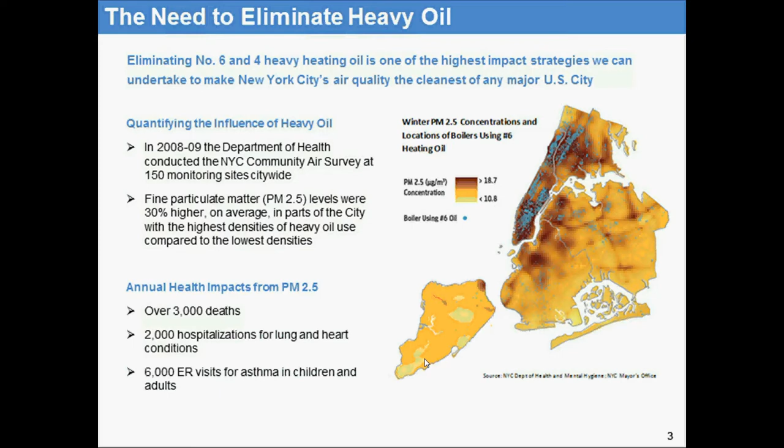And then, so what EDF achieved is a new regulation that the Department of Environmental Protection came out with last year. It started kicking in this July 2012, where every building burning number 6 oil whose permit expires needs to switch to at least number 4 heating oil. So it's not just 2015 like some people think. It's actually when your permit expires.

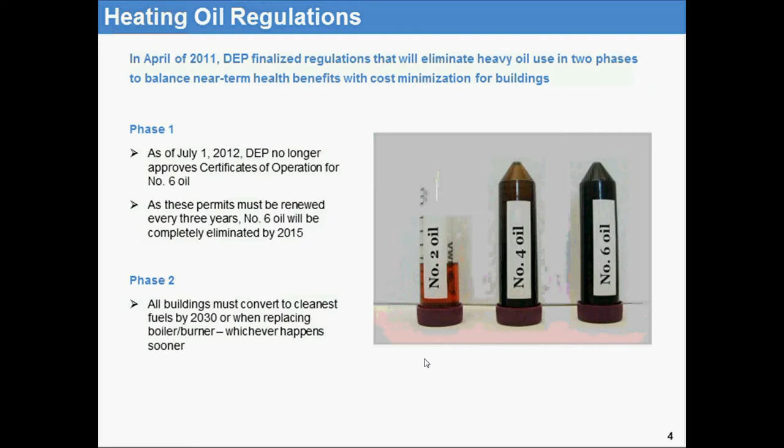Most buildings will have to switch equipment, and so it's much better to be prepared and just switch now all the way, so you're in full compliance with the new law. So that's what this slide is showing. And now I'm going to hand it over to Luke.

And the Environmental Defense Fund has worked with the City of New York on establishing a program that will help buildings convert to the cleaner heating fuels in the most efficient and cost-effective way. That program is called NYC Clean Heat program, and we encourage every building to contact us, ask questions, and work with us so we can all breathe cleaner air as soon as possible. So now I'm handing it over to Luke.

Thank you, Isabel. So as Isabel mentioned, she gave us a great background as to where the regulations came from, and now I'll dive right into what the program is about. So, as Isabel said, it's a program launched by the mayor's office in response to this new regulation to basically provide assistance to buildings that are impacted by this new regulation, meaning any building burning heavy fuel, number 6 or number 4.

We provide technical assistance to any building that needs it, and also financial assistance. So myself, along with our colleagues here at the program, will walk you through the conversion process and will help you basically begin anywhere where you need help. We will pick up and guide you through the process of conversion. There are a lot of programs out there, but this program represents the City of New York and the way we want you to do it.

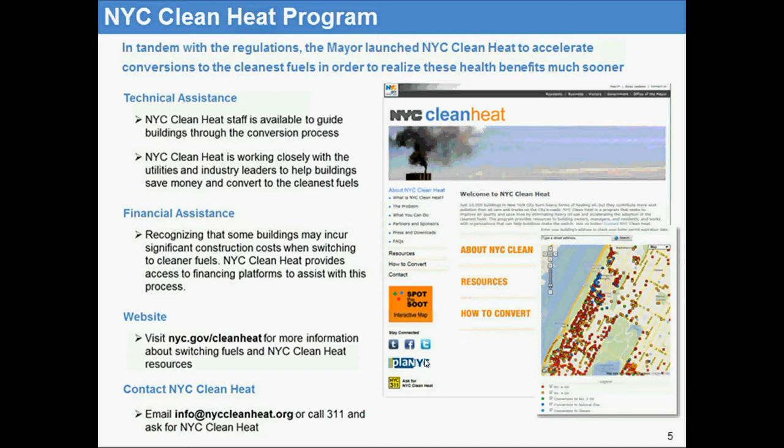So the way the program goals have been established is this program is quantified by the amount of particulate matter, or PM2.5, that we reduce from buildings. As Isabel went into earlier, the particulate matter has some severe health impacts, particularly with respiratory health, and it can be easily reduced by taking out the heavy fuels, the heavy burning oils from New York City, and it will

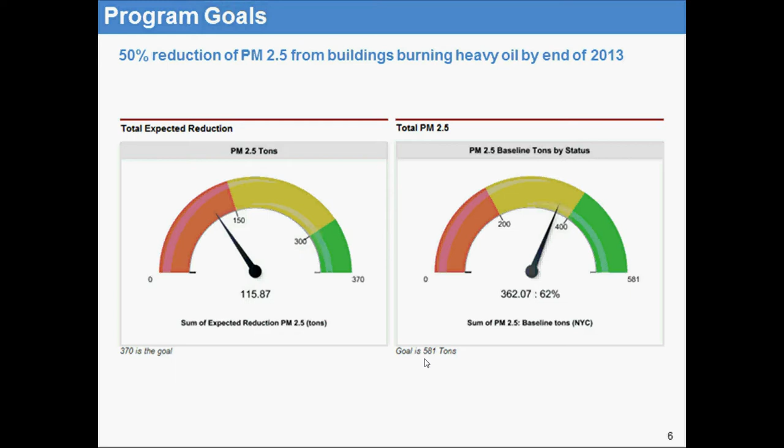Once we have a contact for a building, a property manager or an owner or contact, we will begin to work with you, and that's how we quantify the pipeline, which is very important for us because it's the way that buildings know about the program. And like I said, we encourage as many buildings to work with us as possible. It's a win-win situation. So the Clean Heat program is something very important to us.

The Clean Heat program is a fuel neutral program. We don't promote any particular fuel. We only encourage you to convert to the cleanest available option. Meaning we definitely do not want you to burn number 6 because with the new regulation, it will be illegal to burn number 6. But also we encourage you to not burn number 4 because it's only a stopgap measure, as Isabel mentioned before.

We encourage everyone to go to either number 2 oil, which is now called Clean 2 because of some of the ultra-low sulfur regulations, biodiesel, natural gas, steam, or any other alternatives that may be available to you in your particular area. So very important for us. We are fuel neutral, but we will work with you with whichever fuel you are thinking about, and we will gladly compare any of the available options to you.

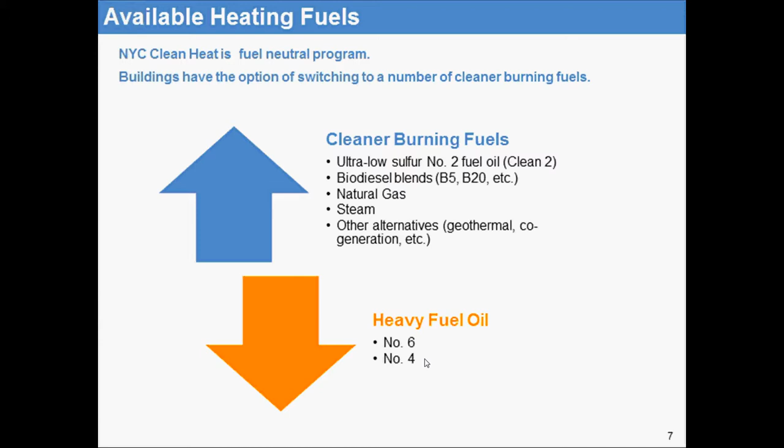So the first thing that has to be done if you're thinking about the conversion process, if you are a number 6 or a number 4 heating oil building, you have to figure out your boiler and burner, whether it has exceeded its useful life, the condition of your equipment, the burner, the boiler specifically, whether or not your burner is capable of burning number 2 or natural gas. In most cases, building burners are capable of burning both fuels. They're usually a dual fuel system.

And what your fuel oil storage situation is. Some tanks become basically outdated and have exceeded their useful life. Sometimes you need to replace them. We're working with very old buildings, so there are different scenarios and different setups in each building. So you have to basically just see what your situation is, and we'll help you figure out the best available options to you. There are some issues with environmental regulations when storage tanks are sitting on the dirt or in a vault.

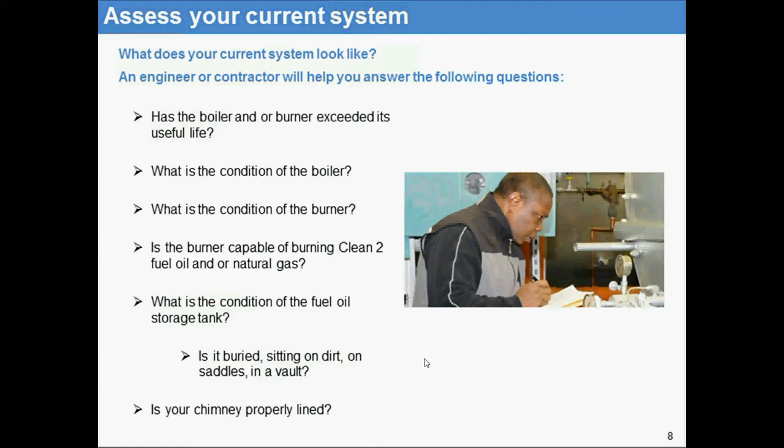One other important thing is chimney lining. If you are converting to natural gas, some buildings will be required to line their chimney. That's a Department of Buildings requirement. So these are all issues. These are the technical issues that I mentioned earlier that the Clean Heat staff would gladly help you, or any of your clients or partners, for that matter, with this process.

So the next step, I'll just start going in. One of the available options is to convert to natural gas. The natural gas conversion process can take anywhere from 6 to 9 months, estimated. Sometimes it takes longer. So it's a longer process. And it all starts with, basically, we encourage everyone to contact us first.

We'll help you figure out what needs to be done. We'll provide you the initial first phase free consulting that the city offers to you. We'll help you determine what needs to be done to obtain your conversion costs. We'll help you calculate your savings and payback. And we'll obviously encourage any property manager, engineer, or energy manager to jump in right there during that process to help you do the same.

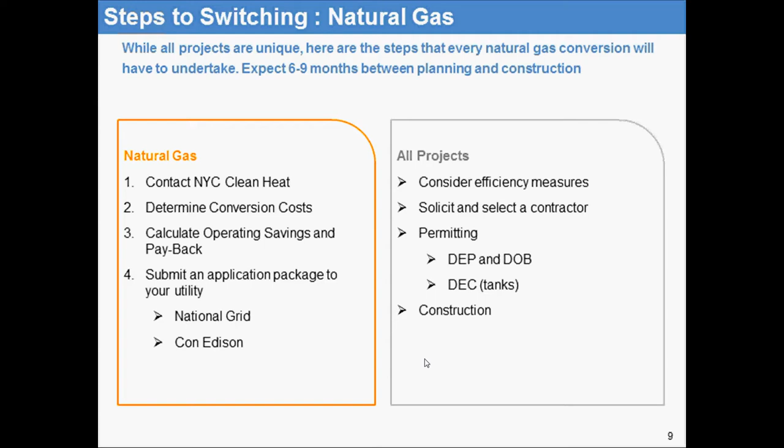And you have to then submit your application to either National Grid or Con Ed, depending on where you live within the 5 boroughs. The 2 utilities have different regions in the boroughs. And as with all the projects, you should consider efficiency measures, get the necessary contractor and the permits, and the construction costs are usually the deciding factor. So that's a quick rundown of converting to gas.

While we're on natural gas, I just wanted to quickly mention the Con Ed area growth plan is now in effect. Actually, the first deadlines to apply to this program are coming up very soon. So we encourage everyone that is looking into converting to natural gas to please visit the Con Ed website and to email us or call us and begin the process if you'd be interested.

Just a quick rundown of the growth zone plan. Basically, you will have to go through various steps in order to participate in the program, and this will get you on course to getting natural gas in your building for the next heating season. And I will gladly go into this in more detail with anyone on the call right now that's interested.

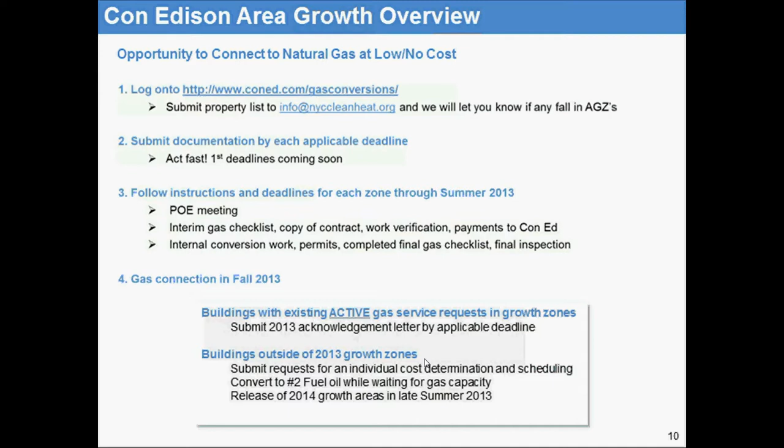For the purposes of this presentation, I'd like to just quickly go over this. Again, this is the area growth zone. These are the deadlines. The first deadline is on December 14th. It may still be possible for some to sign up, so if you are in any of these zones, please visit the Con Ed website and, most importantly, get in touch with us, because we will help you figure out whether or not it's still possible to sign up, and we'll help you expedite the process. Again, there are 3 deadlines we're working with.

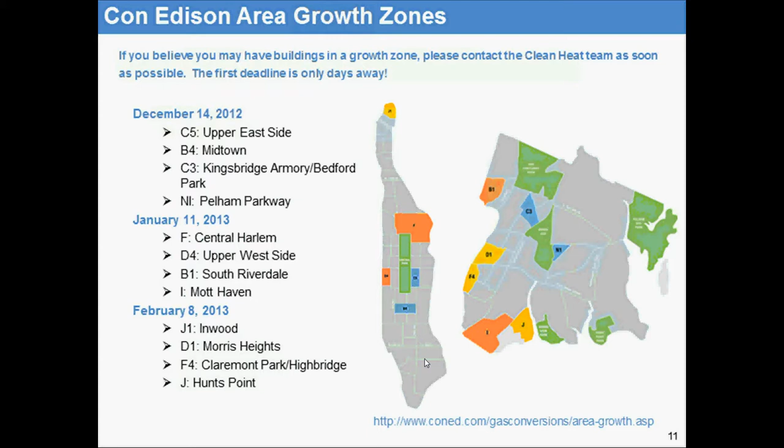The Con Ed growth zones are what Con Ed has proposed to invest in their infrastructure for the next heating season. So all the shaded areas on these Manhattan and Bronx maps are different phases of where Con Ed is offering people to sign up for a group rate. So if you previously received high costs from Con Ed to bring gas to your particular building, this may be one way out of it, or at least it may help to significantly reduce those costs. So please get in touch with us if you're interested.

The other really popular fuel that we promote here is the Clean 2, which is just number 2 fuel oil. Oil-to-oil conversions actually require a lot less time than natural gas conversions because there is less construction that needs to be done. Again, the process is very similar. We encourage you to contact us first. We will help you to understand why ultra-low sulfur number 2, or Clean 2, is the way to go.

If you're having any sort of doubts as to why we promote number 2 as opposed to number 4, Isabel touched on it before, it's definitely a lot cleaner, but we have also proven with case studies and some calculators that we've developed that it actually comes out even to the cost of number 4 when you consider all the efficiencies and everything else that goes into a conversion.

So again, we encourage you to contact the Clean Heat program and determine your internal costs. You shop for a supplier of the fuel, and as with everything we promote in number 2, we definitely think you should consider biofuel as a blend. This will help you with some of the commodity price differences, especially because there's a tax credit available right now for incorporating biodiesel into your blend, and I'll go into that a little later.

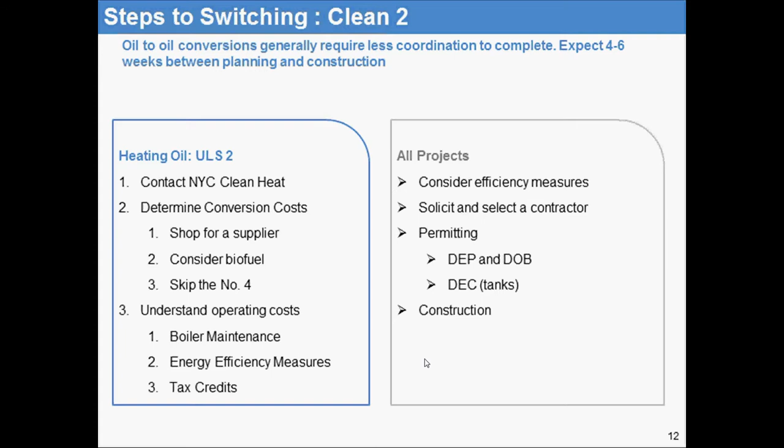Understand your operating costs and your boiler maintenance, and definitely incorporate energy efficiency measures and the tax credits, as I just mentioned. These are all things we encourage you to do, and again, the Clean Heat team can guide you through the process, whether you're an owner or on your board and just considering this, or you're a contractor or an energy manager with clients going through this process. We encourage you to get in touch with us, and it'll help everyone.

So, as I said, number 4 oil is slightly cheaper than number 2, but there are a number of efficiencies, and this is some of the stuff that goes into our calculator, that you gain in burning a cleaner fuel in your system.

So we encourage you to look past the small commodity difference, and we'll gladly walk you through each particular case. Each building is different, each case is different, so we encourage you to get in touch with us.

Cleaner fuels basically provide us with cleaner air to breathe, and it reduces maintenance costs. So if you're cleaning your boiler out many times a year, this is one way to reduce costs, and also to reduce the burden on your staff and on your building, on your equipment.

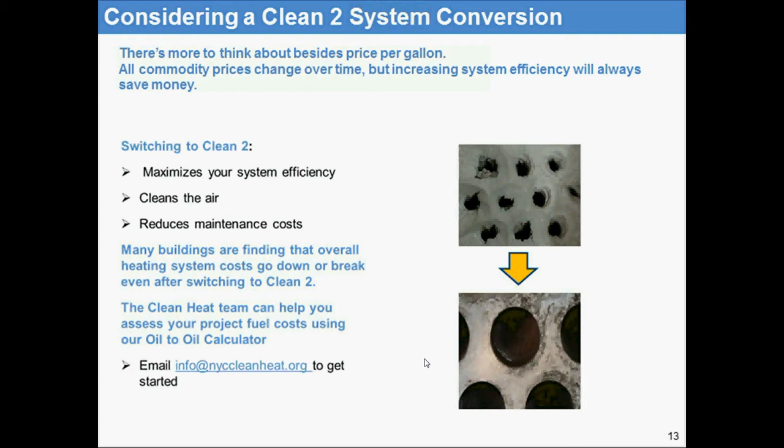Please get in touch with us again to learn more about how and why we encourage Clean Heat. Available financing - this is part of the Clean Heat program. In addition to the technical consulting and assistance that we provide, there's also a financing aspect.

We work with many financial partners that have been vetted and gone through our system, that will basically work with you to provide you with the capital necessary for your conversion, whether you're going to number 2 oil or whether you're going to natural gas. We have partners that will work with you to help you with the process, especially if you don't have the funds or reserves necessary for the conversion process.

A lot of times, we hear about people saying they don't have the money to do their conversion. Well, this is what these financial partners are here for. They will front the money for any project, and simply get their money back from the savings that you will be getting in the next few years, based on the commodity differences - as with natural gas, it's a lot cheaper - or with the efficiency differences, because obviously we encourage energy efficiency measures to be taken into consideration when doing any of the conversions.

So just something to highlight here, NYCEEC, the New York City Energy Efficiency Corporation, is the big provider and backer of finances. Also, NYSERDA is a great entity to reach out to for grants and benefits from energy efficiency measures that can be coupled with the conversion away from number 6 and 4 heating oil systems. Here I'll just go into NYCEEC again, the New York City Energy Efficiency Corporation.

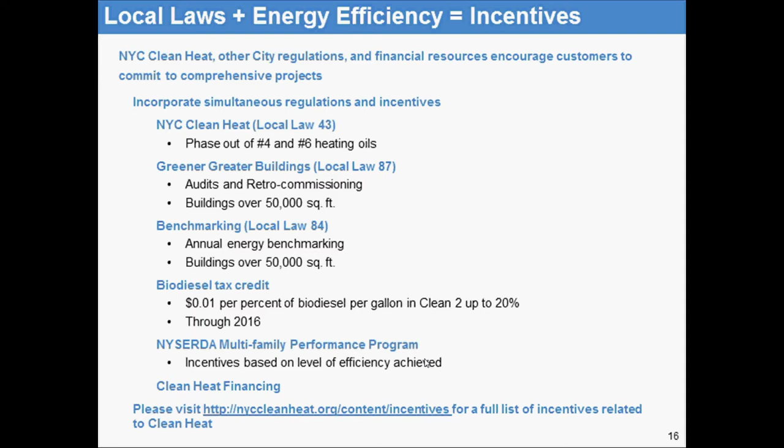Again, this is something that will help us get the 2 commodities, number 4 and number 2, closer together, and basically make converting to number 4 not make that much financial sense, but make a lot of environmental and efficiency sense. So please consider that in your conversion process.

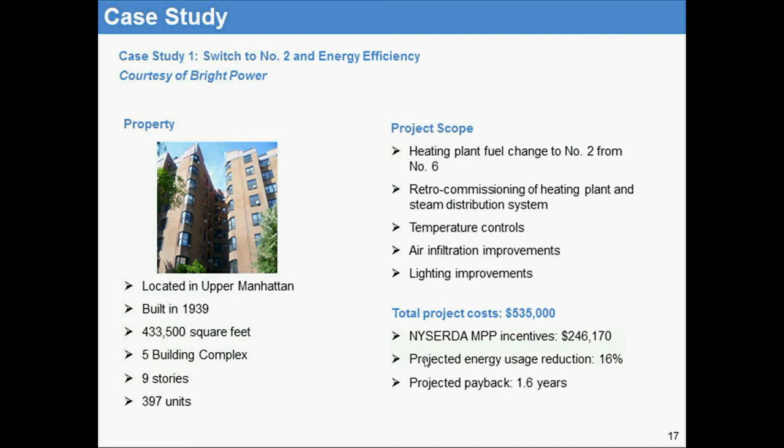Obviously, we see a lot of these. There are great ways to put a solid plan together that will benefit everyone. So please take advantage of all the tools available to you. Get in touch with us, and we will gladly help you out with your particular project.

So again, I'll come back to the Clean Heat team. Being in touch with us will ensure that you're connected to all the technical and financial resources that are available to you for free.

A successful conversion depends on many things, but one of the most important things when you get in touch with us is figuring out what your commodity options are. Because we work very closely with the utilities and know where certain fuels are available or not, we will help you determine your best option to convert.

So if you're burning number 6 or 4, and your triennials or permits to burn are expiring, you need to convert regardless. Getting in touch with us will help you establish what fuel you should use, what's available to you, and when your permit is expiring. Also, we can help you with that.

We can talk to you about your current system, about the fuel providers that are available, the costs, and the time frames that will be necessary with each of the fuels.

Once you're in touch with us, you will be the first to know about any new incentives and programs available, such as the Con Ed area growth zone I mentioned. We also have other number 6 to number 2 oil programs that provide added bonuses and incentives for working with us.